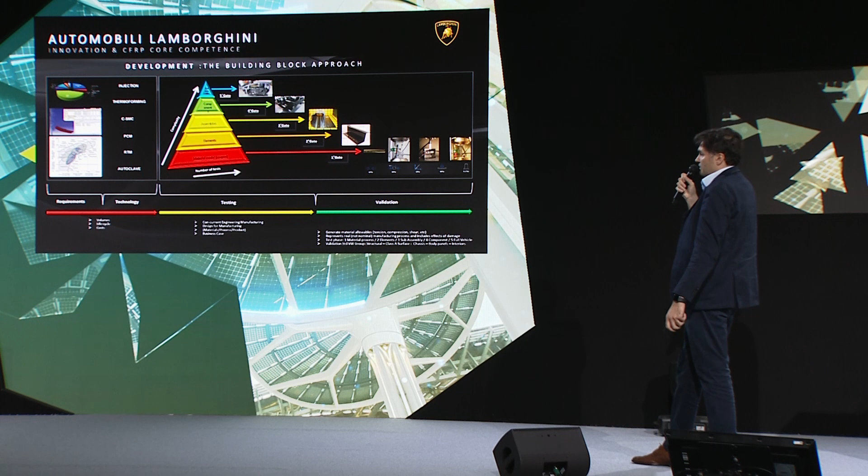You have to follow a concurrent engineering approach together with all our colleagues in all the different areas at Lamborghini. We have to do design for manufacturing, where it can't just look good on paper or in a numerical analysis. How do we make it real? So we have to design for manufacture. So it's a constant process of materials, the process we use those materials in and the final product.

And then we have to make a business case. So we want to use this technology, but how does it stand in terms of costs? And how can we make a positive business case to make it happen? And then the last step is validation. This starts all the way from the bottom of the ladder. So we have to test our materials.

We have a test lab where we can do all of this, or most of the things that we want to do. We generate our own material allowables. They can't just be taken from a data sheet. They have to represent how we're going to use the material. So the material might be influenced by the manufacturing process where it's going to be used. And then the test phase is materials.

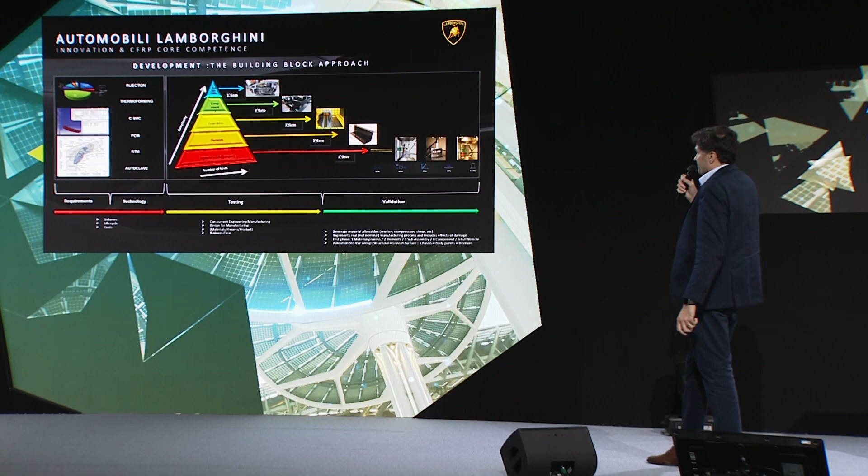Then we go up the ladder again, elements, sub-assemblies, components, and then finally something like a full vehicle crash test where everything has to come together. We follow the standard VW Group validation. So not just all the structural requirements. We have very stringent Class A aesthetic requirements, and this applies to everything. The chassis, which is the focus of the presentation, but also body panels and all interior components.

So I'll try and explain a few of the main features of the Revuelto monocoque. So in 2023, Lamborghini unveiled the Revuelto with what we think is a revolutionary monocoque. So why is it so? Because it's a multi-technology carbon fiber concept where each section of the chassis is picked to be the technology it is for a specific reason. So we're using forged composites, where we won a JEC award, which I'll talk about a bit later. I think it's on the next slide.

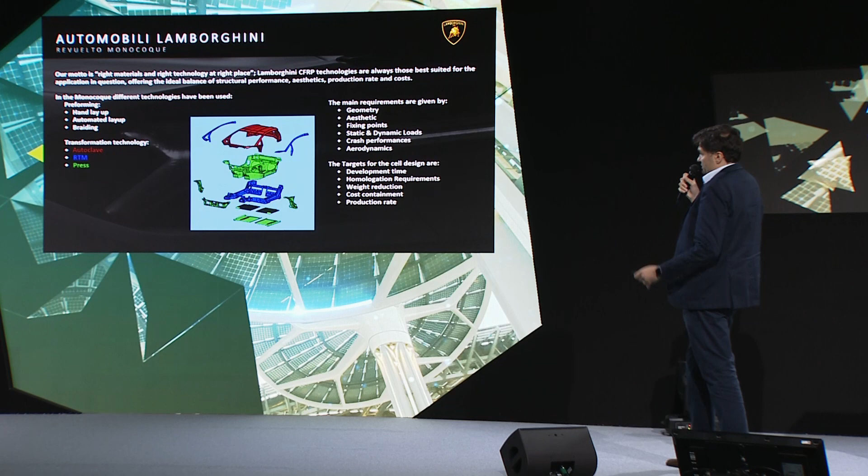So in terms of technology, I touched upon it before. So the motto has to be using the right materials and the right technology at the right place. The image in the middle shows you how we're using different technologies and bringing these together to build the whole chassis. In red, you can see traditional autoclave prepreg technology for the roof area. In green is the CSMC, so short fiber pressed technology. And then we have the structure called the rocker ring in blue, which is an RTM technology where all the primary load paths are managed through the structure.

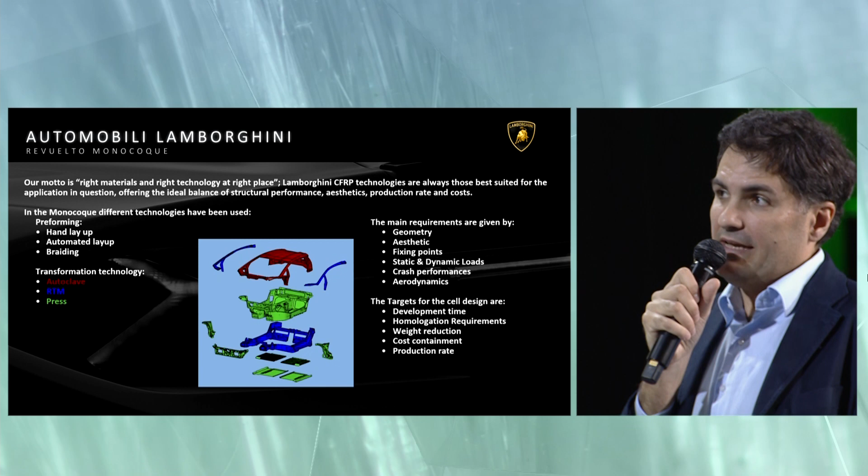So how do we pick? The difficulty is picking the technology for the right thing. So there's many requirements: geometry, aesthetics, fixing points, so basically design constraints, static and dynamic loads, so the aero loads, the crash tests, everything has to come together, crash performance, and of course, aerodynamics. And in terms of the cell structure, we have these constraints, but then what drives our decision-making process is how long do we have to develop this? What are the requirements in terms of homologation? What are we targeting in terms of weight?

And what is the cost? You know, there's always a trade-off. Often it's down to weight against cost. So do we have a weight target that we want to push, and we want to spend more to achieve that weight target? It goes back to the business case that I was mentioning before.

And then production rate. You obviously can't make a full car in prepreg autoclave technology if you need to make 30 a day. So picking the right technology, taking all these things into account, is absolutely critical. And as I said, the design is optimized thanks to large use of forged composite technology, for which we won an award here at the JEC in 2016.

I won't go into too much detail here, but the main advantage is that it's relatively cheap compared to the other technologies, and you have a lot of freedom in the geometries that you can make as it's in the press. And it optimizes efficiency, reducing production time. So again, this technology isn't suited for everything. Where do we pick it and why? And how do we combine it with other technologies to make the chassis the full component that it needs to be?

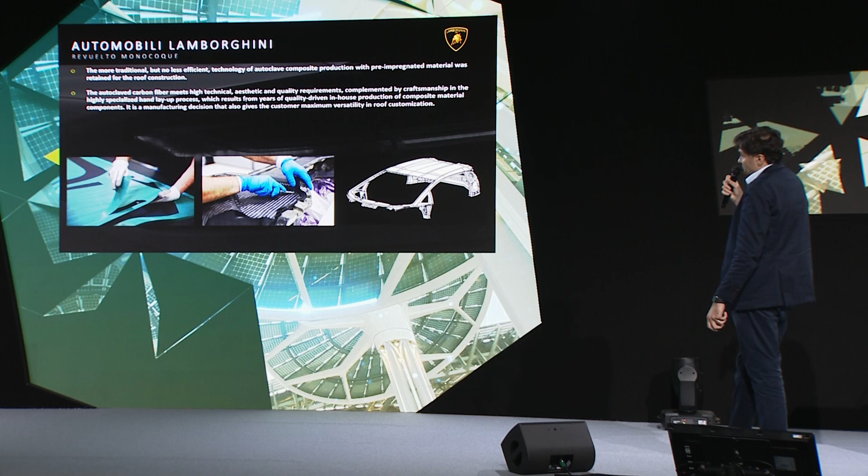And then obviously the roof I mentioned before in the diagram is a more traditional prepreg technology. It's no less efficient. So it's prepreg material, and we retain that in the roof area. And this is for the high technical, aesthetic, and quality requirements that it needs to have. And then it all comes together, you can see there.

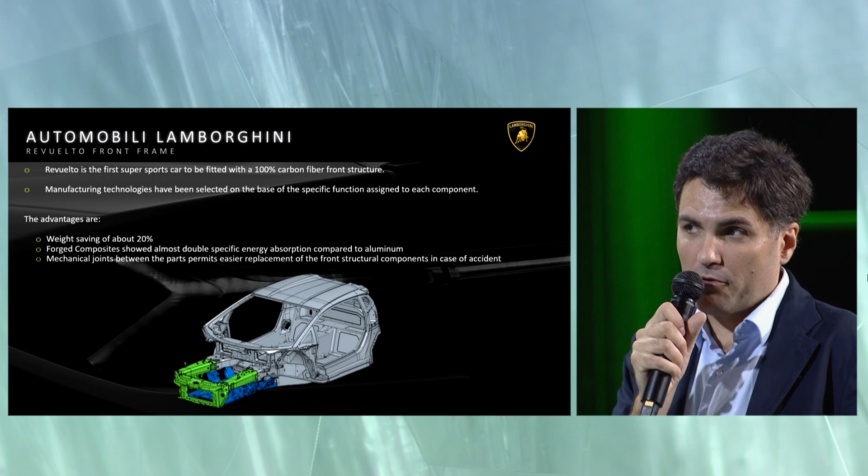And then this is just a slide showing the front frame structure. So the front frame has to manage the crash loads during a crash test. So we used CSMC technology in green for the cones because these have very high specific energy absorption compared to aluminum. So again, you can make a lighter structure because it absorbs more energy with the same amount of material. And then we retain mechanical joints between the parts so you can replace and decouple the front structure from the monocoque behind it in case of an accident.

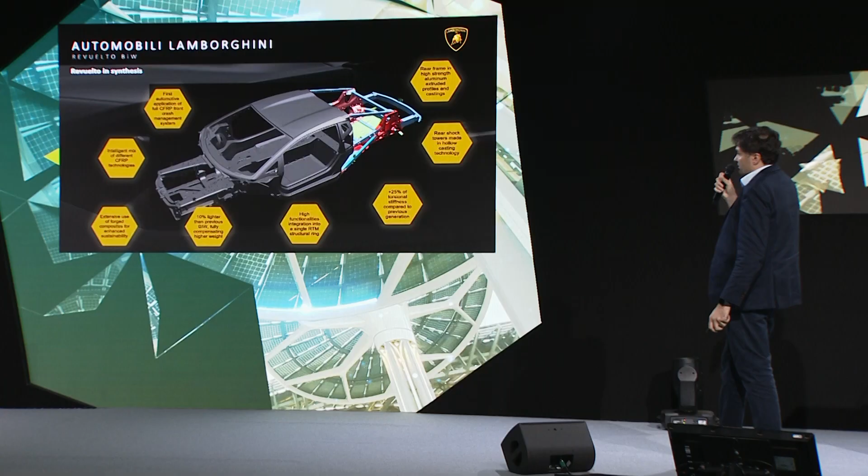So this is just a slide showing how everything comes together. The monocoque together with the rear structure, which is metallic. So it's a rear frame in high strength aluminum, rear shock towers in hollow casting, and then everything comes together with a composite front end to give us 25% torsional stiffness compared to the previous generation, and 10% lighter weight. So we're obviously chasing stiffness, performance, weight, and using the right technology in the right area to achieve that.

And now this brings me to my final section. So what's the sustainability challenge? How do we make all of this sustainable, and what are the challenges that lie ahead? So what's sustainability for us? For us, sustainability is what responsibility do we have? Does each one of us have?

So we need to develop what we call a concept of sustainable development. Everyone needs to behave responsibly to conserve natural resources. And then how do we protect global ecosystems now and in the future? So that involves training and education, and then also the correct action and communication. So sustainability is also the workforce. How do we support the health and well-being of individuals so they can give the best that they can? So that has to be through action and communication.

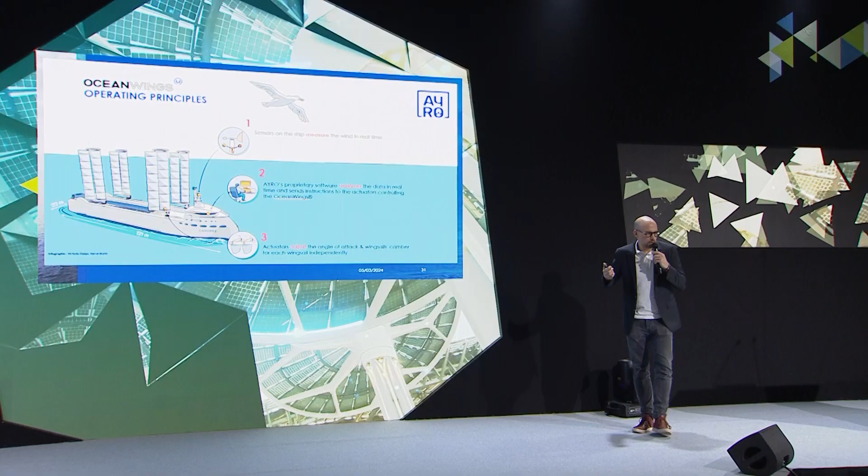They've done 2 cross-Atlantic crossings now. And we can measure the gain from our wings. And we estimate that the gain in fuel consumption is about 35% on Atlantic crossing. So we are still talking about a hybrid system between the traditional engine and the wings.

And the way it's working is we've got a target speed, and we try to maximize the use of the wings to reach this target and to minimize the use of the traditional engine. The way it works, it's pretty simple. You've got wind sensors on the ship, which are giving you the speed of the wind and its direction. And then we've got software which automatically takes into account this data and sets up the wing with the right angle, the right camber, to produce the most efficient power.

The main characteristics of the wings: first, we've got a wing which is made of 2 elements, like a wing on a plane, but working vertically. As I said, the performance is about 2 times better than a traditional wing with the same surface area. The wing is totally automated. This means that the wing can rotate 360 degrees to be aligned with the wind direction.

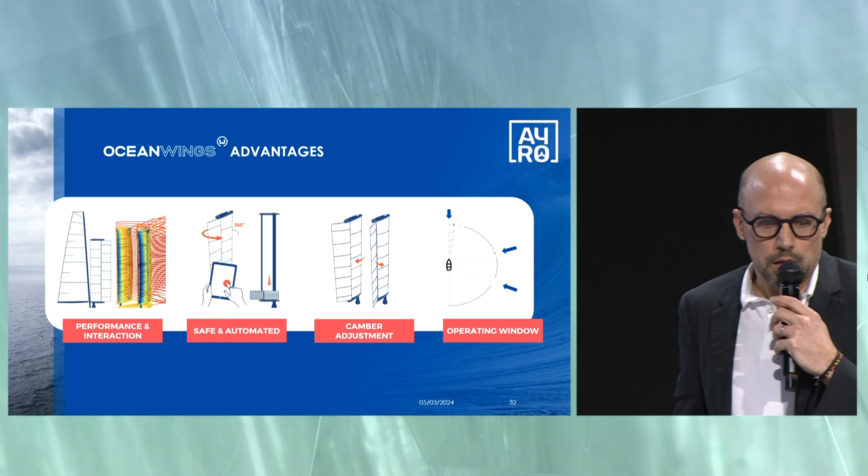You've got 2 elements. The secondary element can rotate as well to adjust the camber. And by adjusting the camber, we are adjusting the power delivered by the wing. And in the case of Canopée, the profiles are made of fabric which is tensioned between ribs. And this profile can be raised or lowered, which means that we've got the main structure always standing up. But if the weather is too hard or if you're in port, you can lower the sail. This is also totally automated.

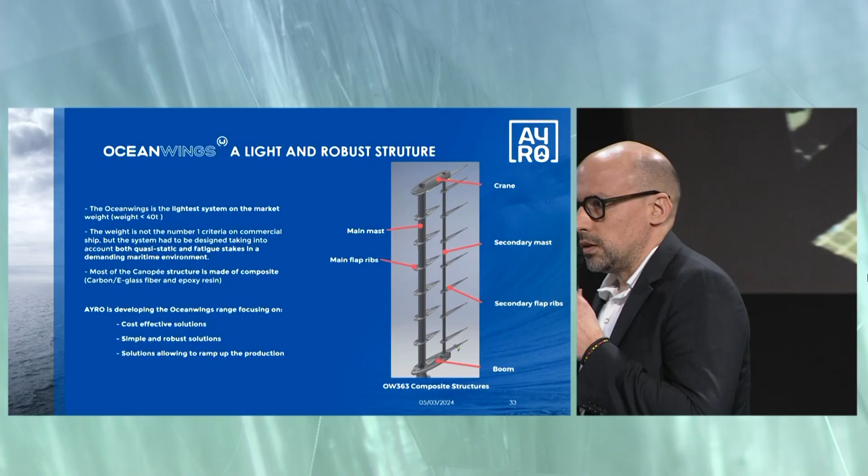And in terms of operating window, we've got a system which can produce power from a wind coming from 5 degrees on the front and then going all the way to a back wind. In terms of composites, the full structure of this wing is made of composite. So when I say full structure, it's what you see on the screen here. We've got 2 masts. The main mast is 37 meters high. We've got a secondary mast, and then both masts are linked by a boom on the bottom part and a crane on the top part.

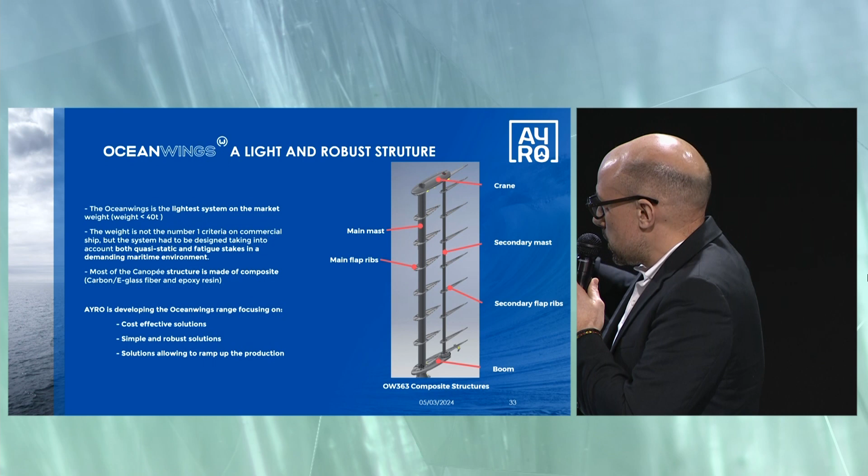And then along this mast are some ribs. And between these ribs, we are tensioning some fabric. And these ribs are in composite as well. We had to dimension this structure to sustain up to 100 knots of wind and also to sustain hard sea conditions. So you can imagine that we had to have a very robust structure.

But at the same time, we need not to be obstructive on the ship and to keep the ship's performance and balance. So we had to have a light component as well, which is where the composite is becoming particularly interesting. It is also interesting compared to steelwork, for example, because in terms of fatigue, the composite is much better.

And on the kind of ship we are working with, the lifetime of a ship is 25 years, and you don't have many opportunities to maintain it because the ships are going over the world all the time, with a good check every 5 years. But between that, we really don't have a lot of access to the ship.

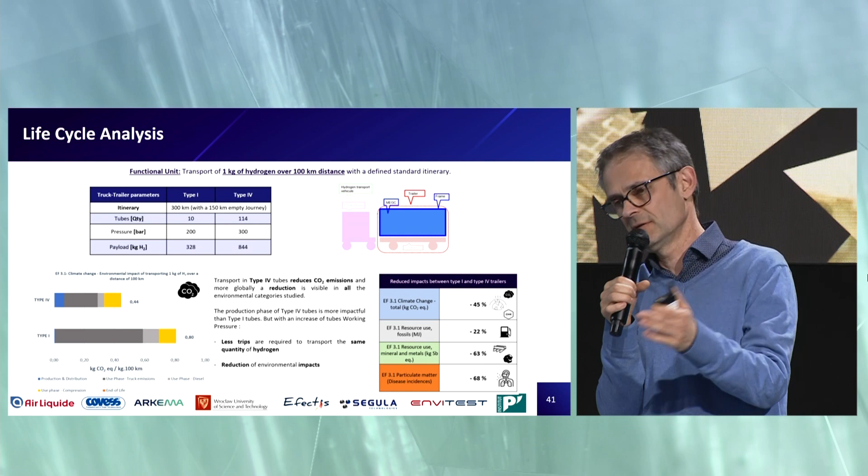Now, about the life cycle analysis. We took the example of 1 kilogram transported over 100 kilometers on a trailer. So far we compared type 1 and type 4 cylinders. And we can see that on many environmental aspects, which can be CO2 emission, fuel emission, mineral resources, we still have quite a good saving for type 4 compared to type 1, and that can be quite easily understood as with the type 4 cylinder, you have to make fewer trips to deliver the same amount of hydrogen compared to type 1.

Now, the conclusion. So far we have been working on the trailer design, and we'll continue to do that. We also developed the thermoplastic type 5 cylinder, whose objective is to comply with the norms, but also with our usages, and we work on the regulation aspect, and we've made the design to safety approach.

Now in the following years, we still have 2.5 years on that project, we will carry out extensive testing of the type 5 cylinders. We'll finalize the trailer design, and that will give us a good idea of the optimum working pressure to store 1.5 tons of hydrogen in the trailer, and we will study the behavior in fire of the tank, and the objective also is to simulate that behavior based on the thermomechanical analysis of the processed material.

We will also carry out tests relative to usages, which is drying tests. We need to be able to dry these type 5 cylinders with existing equipment in filling centers, as we do for type 1. And we will also carry out filling and unfilling testing in order to find out the optimum parameters, just to make sure we never go below the minimum allowed temperature and never go above the maximum allowed temperature.